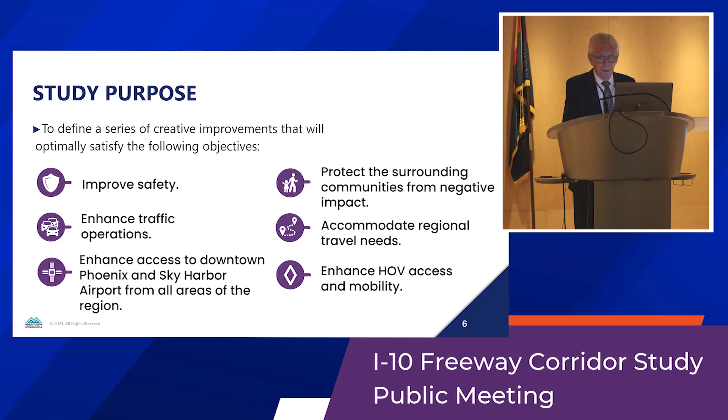The purpose of this study is to improve safety, enhance traffic operations, and enhance access to and from downtown, the airport, and other nearby areas. We want to protect the surrounding communities - that's a very important objective for us. We also want to accommodate regional travel needs and enhance high occupancy vehicle access and mobility at the same time.

This has been going on for a while. About a year ago, we started a public survey. I'll be talking about the results of that in a little bit, where we asked you questions about your perceptions and your recommendations going forward. After that, we tested some different alternatives and came up with an initial set of recommendations moving forward. We're now meeting again with you to share those recommendations in their draft form and give you an opportunity to comment, ask questions, and help us finalize a set of recommendations.

That will happen this winter. After that, once it's approved through our governing body - for the Maricopa Association of Governments, it's not a board of directors, it's actually the regional council, which includes every mayor of every city and town in Maricopa County, parts of Pinal County, including Native Nations, and Maricopa County and Pinal County themselves - those are the people who will make the decision moving forward on this project.

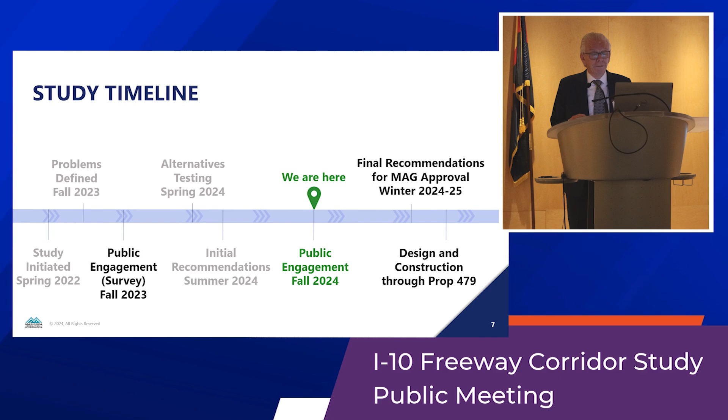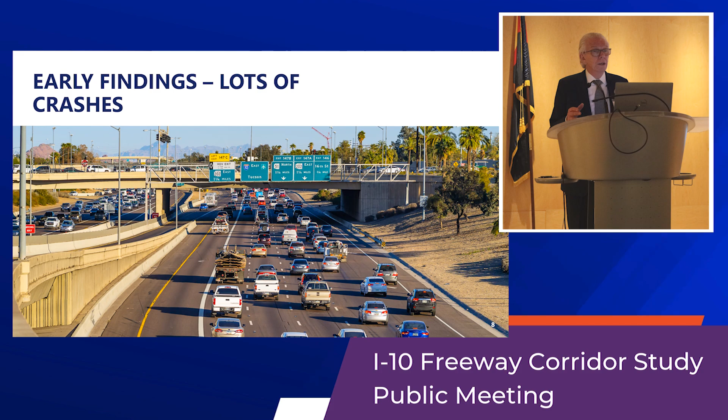Early on, going back more than a year ago, we started to look at this project to find out what we thought were the problems. And almost immediately we discovered this corridor has a lot of crashes.

But the interesting thing is, between 2016 and 2021, a 6-year period, there was an average of almost 5.5 crashes every day in this corridor. That's a lot of crashes.

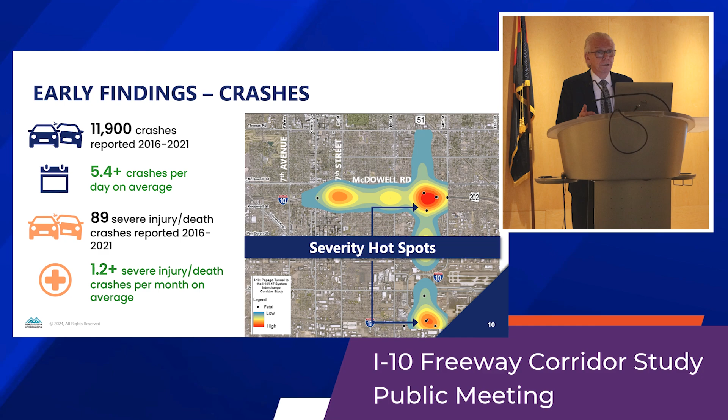Now, the other thing we looked at is travel speed. We wanted to actually put some numbers together and quantify this, so we developed a sophisticated micro-simulation model so that we could look at this as the peak hour starts and ends and see how things are going.

So what I'm going to do now is take you on a little bit of a trip, one you may have made many times. We're going to go on I-10, starting by the mini stack, just getting off of 51 or 202 and heading down towards Sky Harbor Boulevard. As you start this trip, it's early in the hour and things are doing really well - we're averaging 59 miles an hour. Not bad. But as we start moving down, it gets slower and slower, and by the time you get to Sky Harbor Boulevard, you're at 8 miles an hour on average.

What's really happening here is that there's some kind of an event down by Sky Harbor Boulevard - cars are stopped. If you're traveling this at the beginning, right after that happened, you're still going 59 miles an hour. You can go all the way down past Jefferson Street before you have to slam on your brakes. But as the hour progresses, that queue gets longer and longer, moving up and up on the road, and by the end of the hour, you're hitting your brakes before you get to Washington Street. So that's one of the situations we have to deal with.

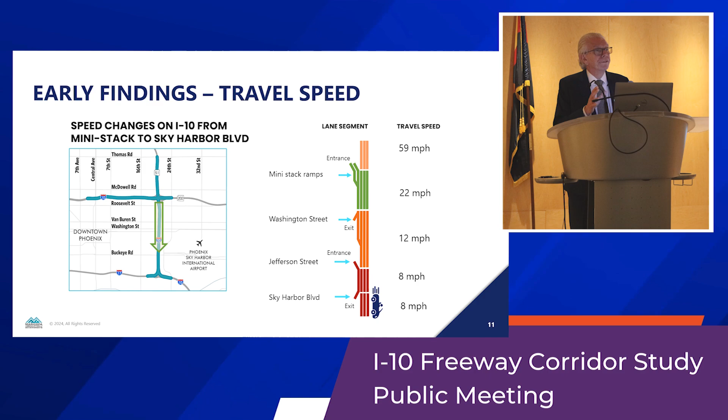What's happening here is cars are queuing back from the mini stack. They want to go to the 51 and the 202, but you have to wait in line. The right-hand two lanes are backed up all the way past the 16th Street off-ramp, but the lanes on the left, people are still going 59 miles an hour.

So you have a problem now where you can be in one lane where it's very slow, and the next lane over, a car could be going 30 miles an hour faster than you are. This is a problem for weaving, creates incentives for queue jumping, and creates a lot of stops and starts.

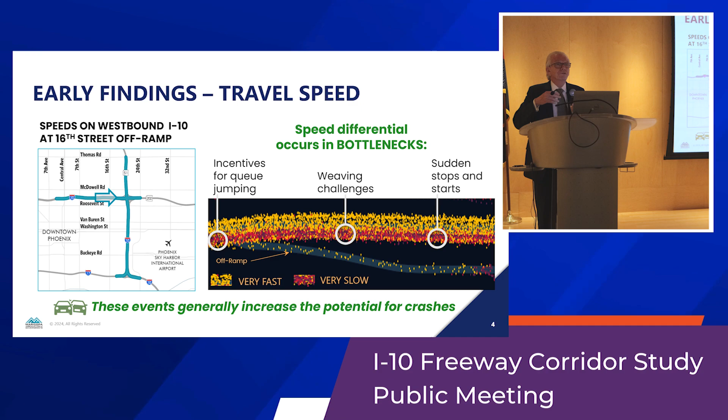Now, the thing that is consistent about these two trips we just took is that they both involve vehicles moving at vastly different speeds, but in close proximity to each other. That's something that, when it occurs, tends to increase the potential for crashes. So as we looked at this, we wanted to find where we have that differential in speed. If we can solve that problem, we can reduce the number of crashes.

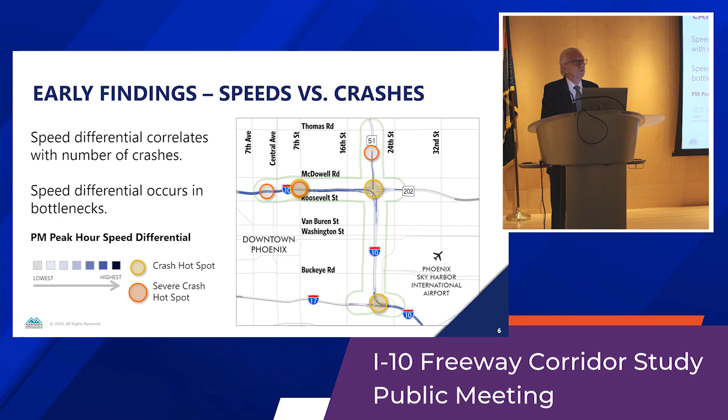Those were our basic conclusions. Safety is our highest priority. We want to increase capacity and reduce congestion, but our primary objective is safety.

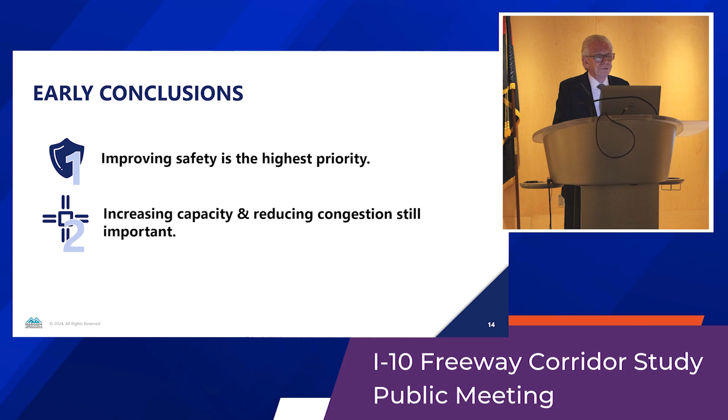Now, this is from last year when we started the survey. And for those of you who participated, thank you very much. We got almost 2,000 responses.

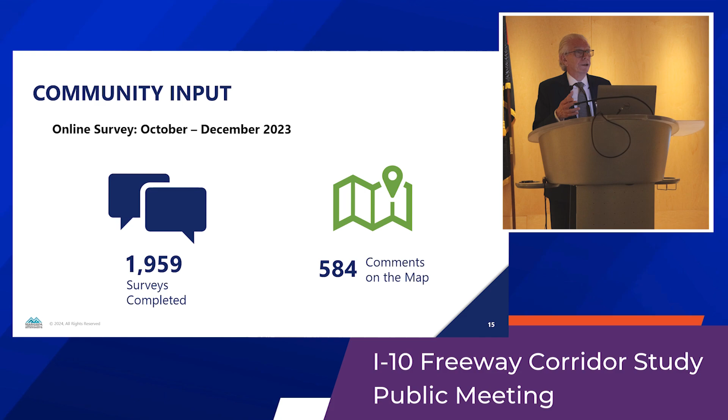We also had an interactive map on our website. You can actually go there and put comments on even now. And this is what we learned from you.

We asked, how bad is congestion? So 80% said out of 5, 5 being the worst, it's a 4 or a 5. Probably averages something like 4.6.

And what are those impacts that this congestion causes to you? The highest one was stops and starts, followed by erratic driver behavior. Those are safety measures, related to safety. Now, long travel times was a very close third, but it came after safety.

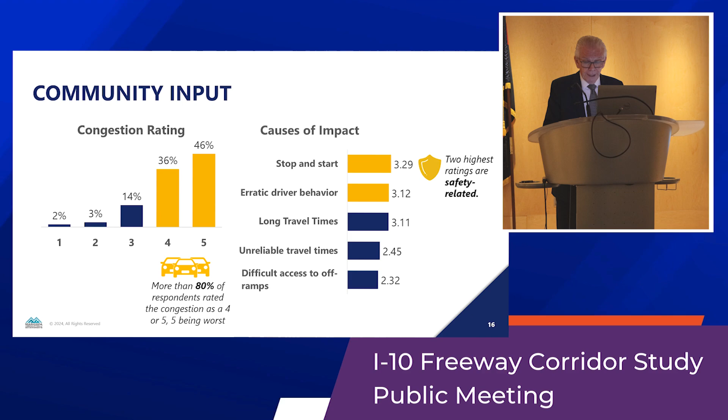We then asked the question, do you try to avoid this corridor when you travel? 56% said yes. Why? Again, it was the same: stops and starts, erratic driver behavior at the top, followed very closely by long travel times, slow speeds.

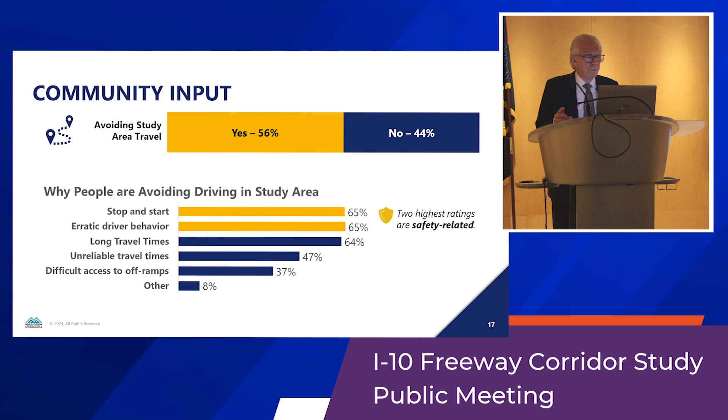Then we asked, what's the most important objective of improving this area? Again, safety came up on top. So you told us safety is the highest priority. That was followed by travel time and ease of travel. Travel time, of course, is speeds, ease of travel, that's a safety measure too, so that's sort of half and half. But other objectives were also important: surrounding communities, access to jobs, and other things.

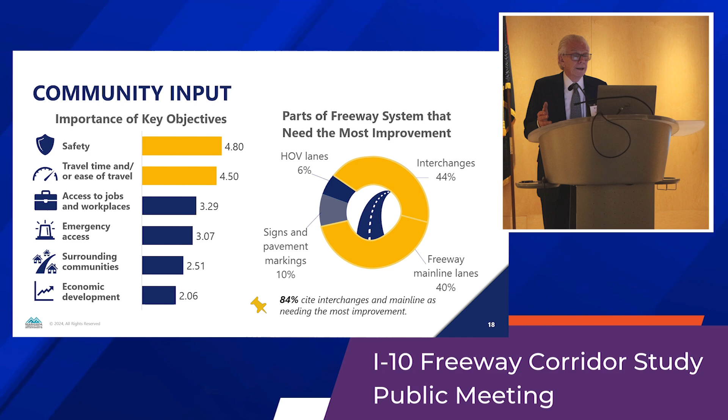When we asked what types of improvements need to be made, 84% said at the interchanges and the main line. That told us we needed to look at design solutions in order to be effective. Now, the last question we asked was, do you support this? Overwhelming support, 97% said yes.

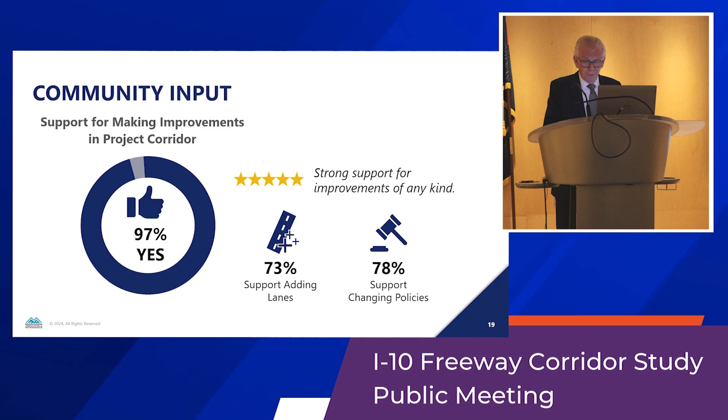So we felt that we're all in sync here. We know the importance of this. We think safety is the most important thing. So the messages you gave us were that we need to improve safety as the highest priority, we still need to work on capacity where we can, and we need to protect the existing communities and provide access at the same time.

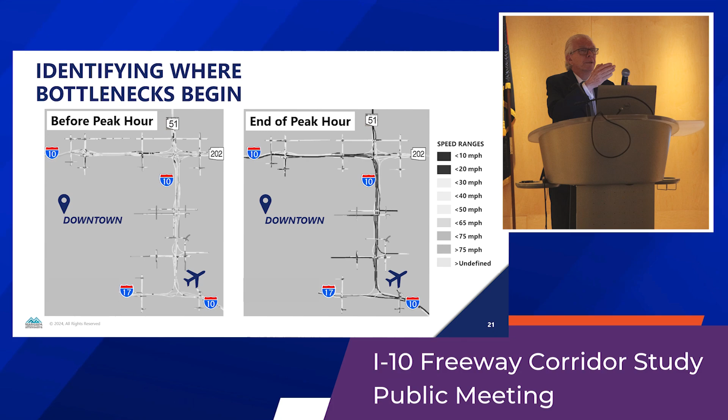So how do you figure out where to make the improvement? The way that we did that is we would run the simulation starting before the peak hour, and every 5 minutes we'd stop and take a snapshot. If you look at the figure, you can see there are some little black lines that are just starting to form. So every 5 minutes we would look and see where those lines were forming and getting larger. When we did that, we found that there were 9 locations that needed to be addressed in order to reduce the speed differential. I'm not going to go through the details, but we do have a board somewhere you can look at to see where those locations are. You can tell us whether we did a good job of identifying them or not.

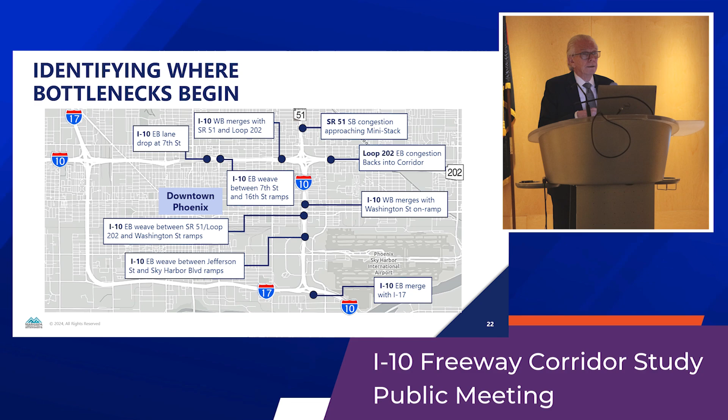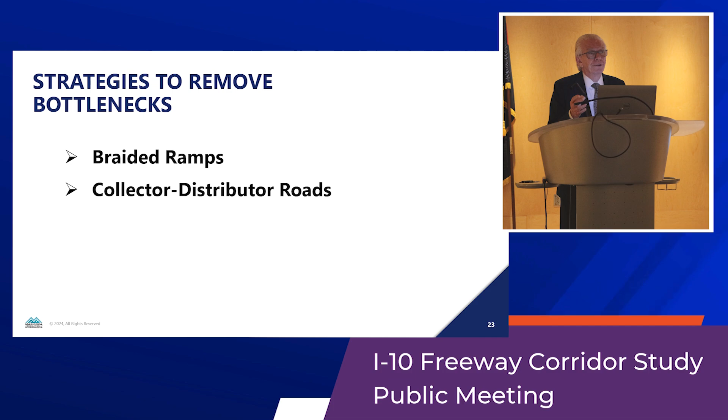The next question is, okay, how are we going to remove those bottlenecks? What can we do? We came up with 2 basic strategies. One is called braided ramps, I'm going to define these in just a moment. And the other one is a collector distributor road. So what is a braided ramp?

A braided ramp is, let's start with a condition where you need to do something. There's a short weave section. Here you're seeing cars moving from the left to the right, and there's an on-ramp coming on, then an off-ramp on the other side. Now what happens is, as you're coming from the left, cars join, so you have more traffic in the middle, but they have to change lanes. They have to weave back and forth, and then you get to the off-ramp where some of that traffic leaves. So the heaviest traffic is in the middle, and that's where you have the weave. And if too many cars are trying to weave, or if those ramps are too close together, that creates a bottleneck.

The solution to that is you take these 2 ramps and you move them the other way, you crisscross them like this. Now when you do that, the problem is the 2 ramps run into each other, and so we have to build a bridge. That's why we call it a braided ramp. So that's one of the solutions, and you'll see in a minute we do that a lot in this corridor.

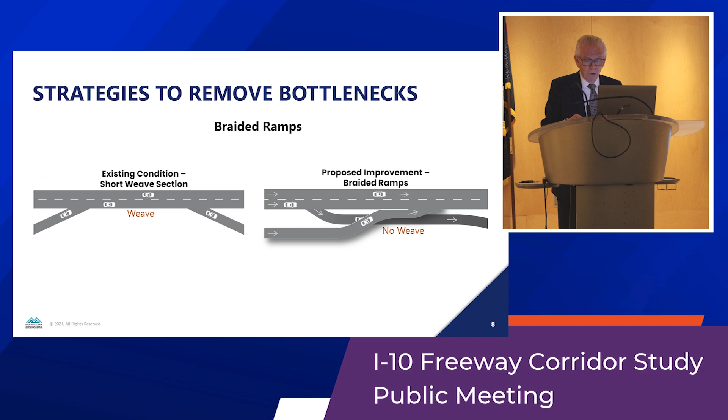Here's an example of where we have braided ramps today. This is right at the mini-stack interchange at the 24th Street on-ramp and off-ramp. You can see that we have ramps going to the other freeways that are braided across here.

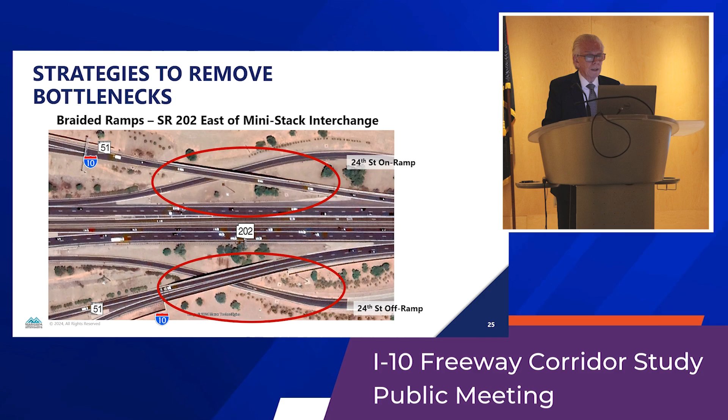Now the collector distributor road is very similar. It starts with the exact same problem, you have these 2 ramps, and now we're going to move them like this, but a little bit further away, and instead of building a bridge, we're going to connect them with a parallel road, sort of a frontage road. So what happens in this case is, instead of having the most traffic in the middle where you're weaving, you move the weaving traffic off to another facility, so there's no weaving on the main line, and the traffic is lower on the main line. So these are the 2 primary strategies we've used in developing our recommendations.

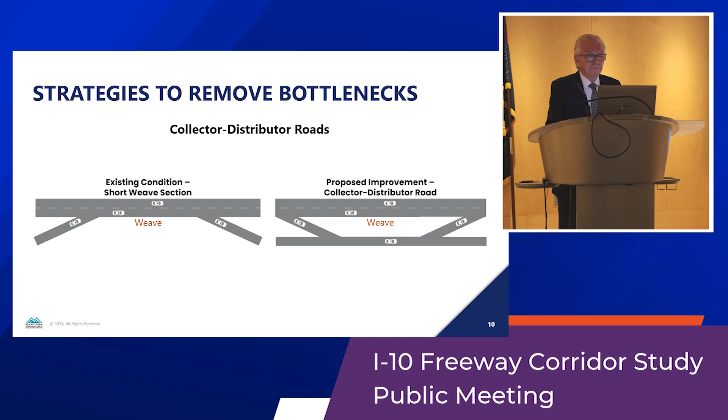Here's an example of collector distributor roads that are being placed on I-10 at the Broadway curve now.

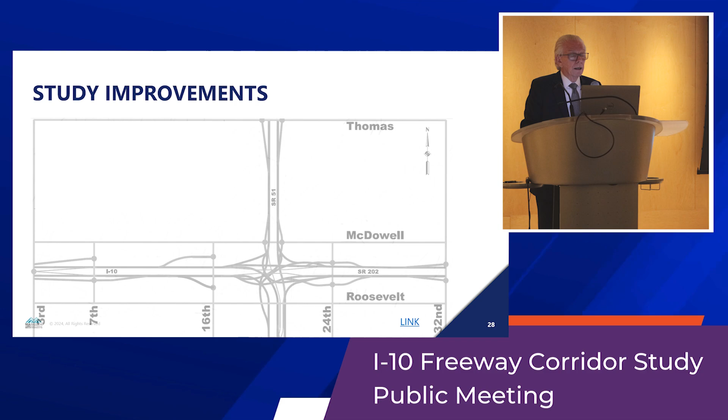What I'm going to do now is go through the recommendations we're making as draft recommendations, and you'll see them on the maps we have on the tables in the back. I'm going to start with westbound I-10 between the 16th Street on-ramp and the 7th Street off-ramp. This is an area that has a whole lot of weaving, and certainly traffic backs up here a great deal.

So the solution is to build a long braided ramp. We move the off-ramp onto 7th Street all the way to the east to the mini-stack, inside of the mini-stack interchange where those begin. And then the 16th Street on-ramp actually bridges over top of it.

And we also have to move the 51 ramp that goes to westbound I-10, also has to be raised up and go over. Now, you'll find something interesting: that purple line that comes off of SR 51, if you follow that along I-10, there's no exit ramp there anymore. So it appears that that connection is lost.

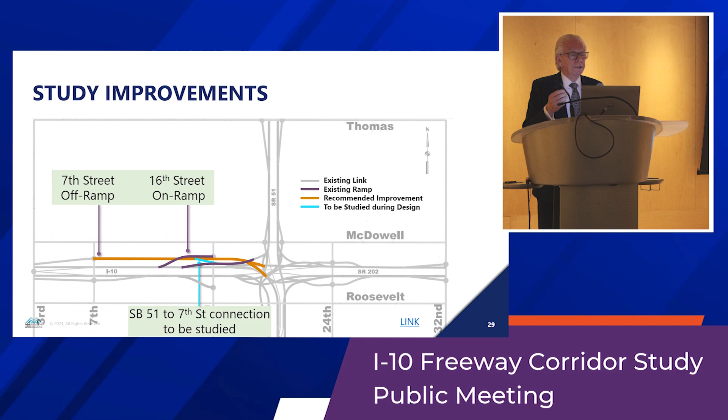We know that that's a problem. We think we have a good way of solving it. The problem is that we have to go through a higher level of engineering to ensure that we can actually make that happen. And so that is going to have to wait until the next stage of design for us to be able to put that connection in. But we certainly intend to do it. We just can't promise it yet until we get to that higher level of design.

Moving in the other direction, we have the same problem between the 7th Street on-ramp going eastbound and the 16th Street off-ramp. And the solution is very similar, only this time we take that on-ramp at 7th Street and take it all the way over, and it takes the traffic to the 51 and the 202. So all of that traffic is removed from the main line and put on this parallel ramp.

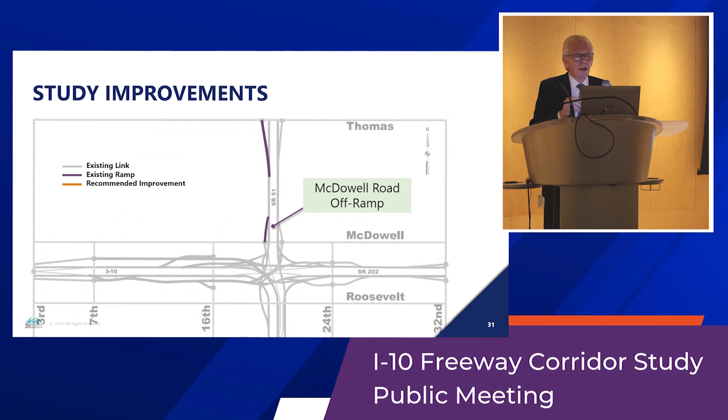The next location is coming south on 51, where you have the Thomas Street on-ramp and the McDowell Road off-ramp. And we do the same thing. Again, another long braided ramp to make that happen.

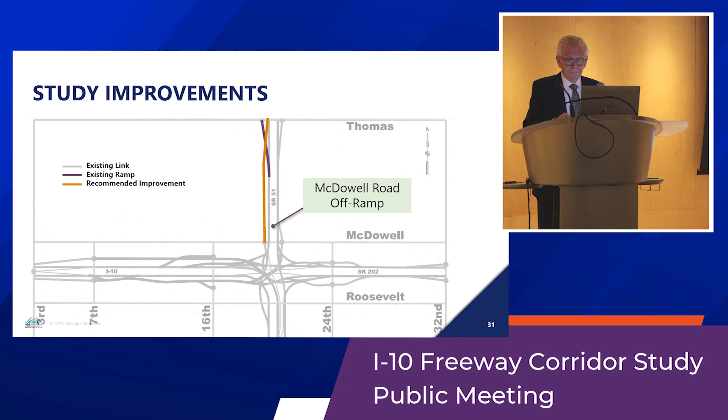Now we go further south. This is an area where the ramps are very close together, Jefferson Street on-ramp and the Sky Harbor Boulevard off-ramp. And again, similar solution here.

In this case, in addition to providing the ramp to Sky Harbor Boulevard and keeping the Jefferson Street on-ramp to I-10 in its place, we also can connect from the Jefferson Street on-ramp directly to Sky Harbor Boulevard, so that that movement is not lost.

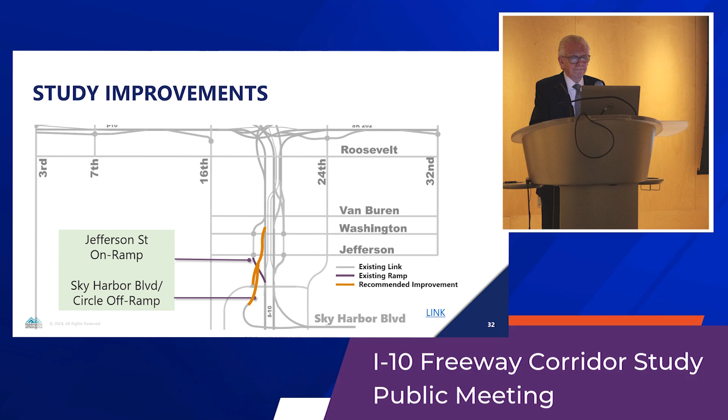Now going in the other direction, going from Sky Harbor Boulevard northbound, we have again between Jefferson and Sky Harbor Boulevard a weave, and other problems further north. This is where we put in a collector distributor road. The difference here, if you're coming up on I-10 and you go past Sky Harbor Boulevard and you want to go to the 51 or the 202, you get off here. And then you can carry that orange line all the way up to the 51 or the 202.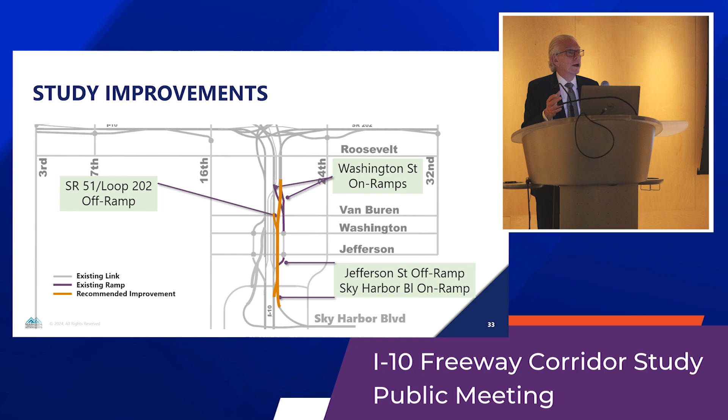If you're on Sky Harbor Boulevard and you want to get on I-10, you don't go directly onto I-10. You go on that collector distributor road until you get past Washington Street, and then you curve and go over onto the main line. So all those movements are there, they're just made in a way that you don't have all that weaving to deal with.

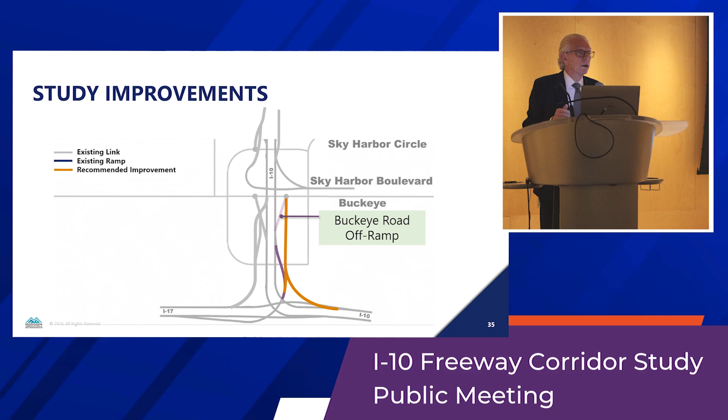Going in the other direction, we have a similar issue. And in this case, we actually create a ramp that goes directly to Buckeye Road. So the only people getting onto I-10 are people who want to get on and stay on I-10.

Then the last improvement that we're recommending is on the HOV system. This is between the mini stack, where you have HOV lanes coming from the 202 and coming from the 10 that merge together. Today, there's one lane in each of those ramps. They merge into a single lane, and then that single lane goes over, and when you get to 3rd Street, there's a direct access ramp that gets you to 3rd Street from the HOV lane. What we're doing here is adding a second lane in that section, so it will be easier for people to weave and find where they're going, and traffic will move more freely.

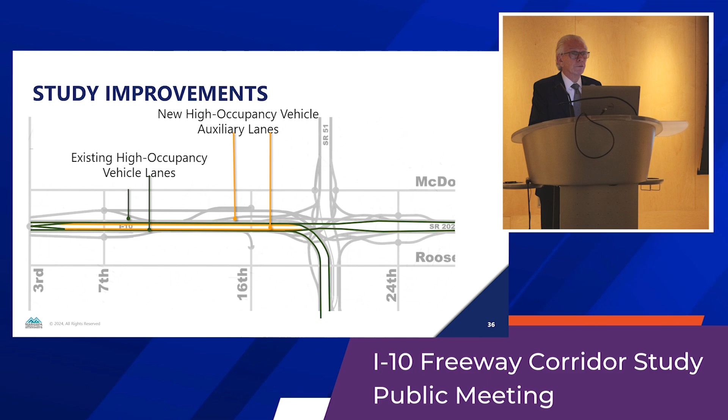So what are the results of these? I'm going to show you now our statistics, comparing what things are like today to what things would be like in the year 2050 after we made these improvements. So we're not comparing before and after for the year 2050, we're looking at 2050 compared to today. Today, in this case, is actually the year 2018. That's where we had the most data to calibrate our model. But that was pre-COVID and very similar to what things are like today.

Now, if you're traveling all the way from Sky Harbor Boulevard to 7th Street, it's a lot longer than 3.4 minutes of delay. But when you have shorter trips in there, this is the average for all those vehicles as they're going through.

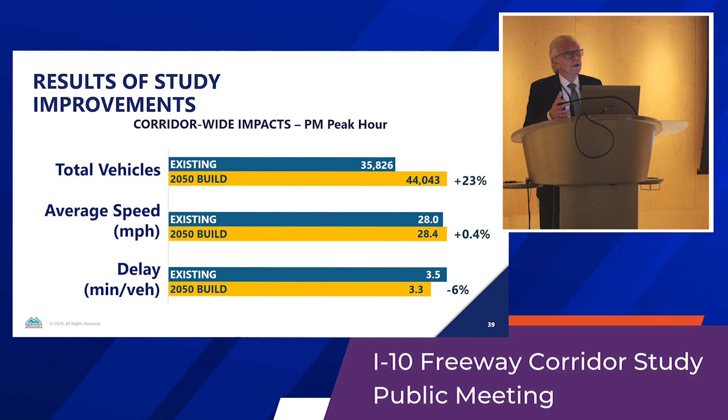So what you're looking at on the right is going to be what you experience for 20 hours out of the day. But the PM peak hour is going to look a bit different. We still get the same kind of improvements, but they're not as large. We get an even larger improvement for the number of vehicles that are able to go through, and we do increase average speed, but not by very much. And we do reduce the delay, but again, not by a whole lot. So when you think about it, a lot more traffic going through there, but it's going to be better than today, just not a whole lot better.

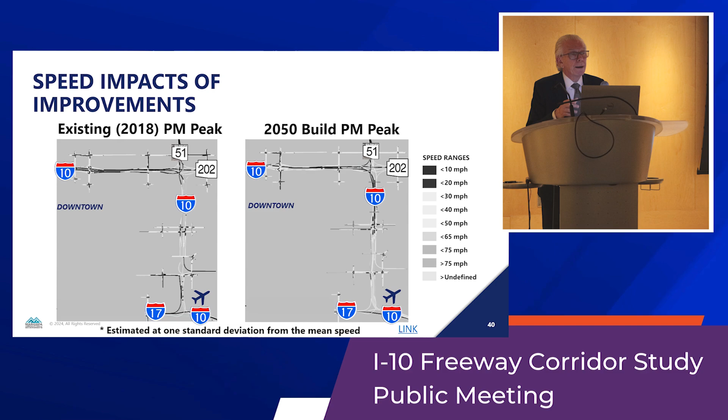Why aren't we seeing the same results we got in the AM? This is the PM peak hour, and you can see that there are black lines today, and will be black lines also in 2050. They move around, they're not in the same place.

The reason this is happening is because we have some constraints that we really can't do anything about. The biggest one is where we are right now, underneath us—it's the tunnel. The tunnel has a limited capacity. It's basically maxed out today, and it's not easy to get much more traffic through it. So we have to live with that. In the PM peak hour, we just can't get all the cars through that tunnel the way we wish we could.

We have a similar problem on the 202 and the 51. Those freeways are maxed out too, and there's no room to improve them. So these constraints make it so that we're not able to carry all the demand. We have to live with that, but we can make it the best we can and find other ways of handling that additional traffic.

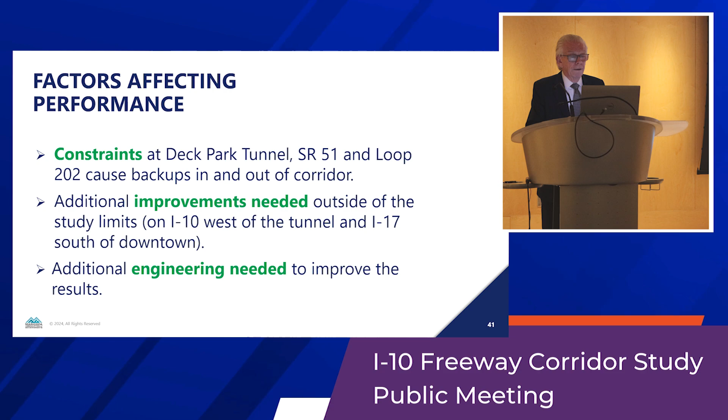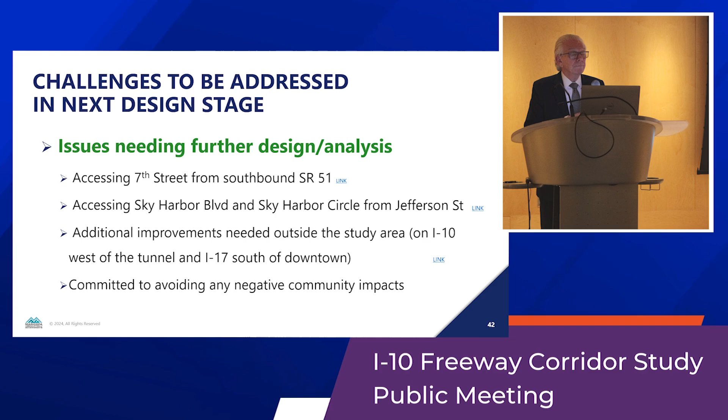I mentioned there are some challenges. Certainly that access from the 51 to 7th Street is one of them. We have another issue at Jefferson Street and Sky Harbor Circle. And we also need to look outside so that we can make things even better than what we see here.

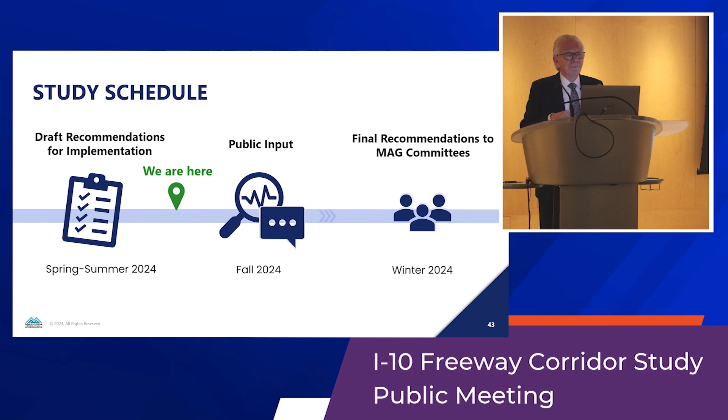Our schedule is, we're taking input from you. We have about a month to get that input. That will help us to finalize our recommendations, and we'll take them to our committees for approval. Just a reminder, this is the beginning of the process. There are some issues we know we have to address, and they need to be addressed more directly when we have the higher level of engineering in the design process.

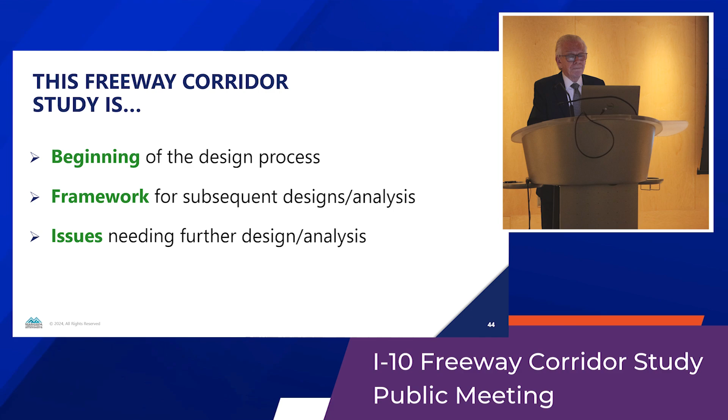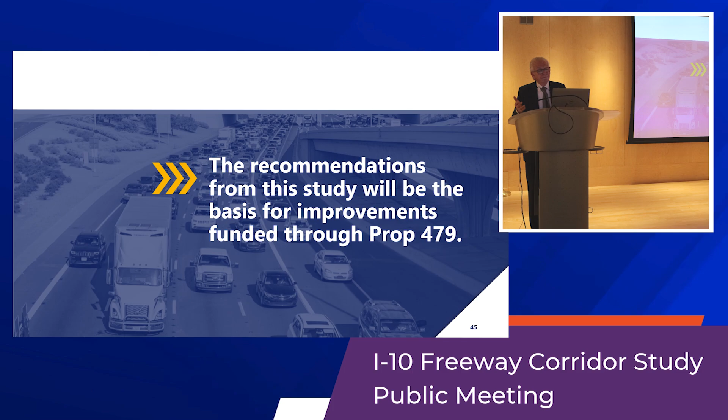Finally, the improvements that you see here that we're recommending will be funded primarily through the sales tax for transportation in Maricopa County. There's a ballot measure in November for that to be extended, and that will be the primary funding source for these improvements.